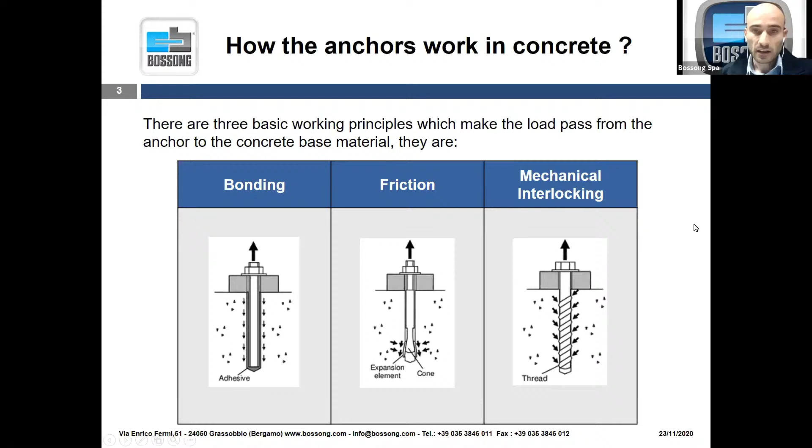So, how do anchors work in concrete? To understand how anchors work in this type of base material, you can see this slide. It's quite easy, and the main principles of working are bonding, friction, and mechanical interlocking. Just to give you a simple overview, you can find each type of mechanism correlated to the type of product that you can find in the market.

Bonding means that bond adhesion is created between the rod and the base material, so basically you have a chemical anchor with a threaded rod or a rebar. Friction is typically used by sleeve anchors or through bolt anchors: the expansion of the cone creates friction between the cone itself and the concrete surface. The other type of mechanism is mechanical interlocking, where the particular geometry of the steel element guarantees an interlocking between the concrete and the thread.

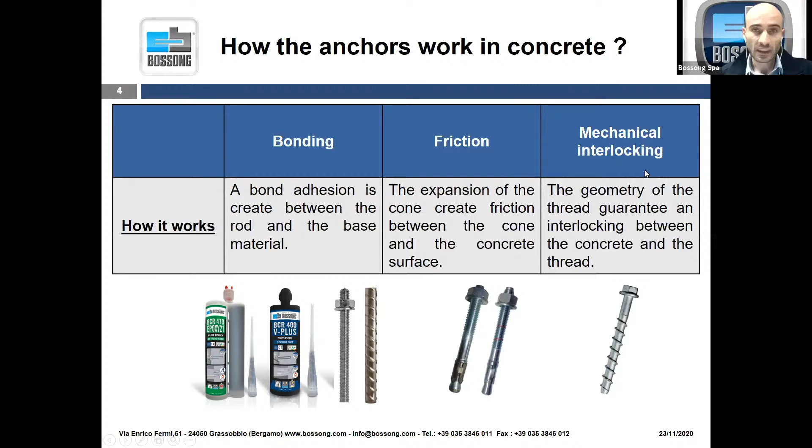The other really important step is the design principle of anchors in concrete. Within the world of fixing, two theories behind anchors in concrete are well known, depending on the type of installation. The first is the standard fixing theory according to concrete capacity design, CCD. The other one is the reinforced concrete theory. In the first one, the main application is fixing a steel element, like a metal plate, to a concrete substrate.

In the second one, the reinforced concrete theory, the target is to connect a new reinforced concrete element to an existing reinforced concrete element. For this purpose, typically only bonded anchors are used.

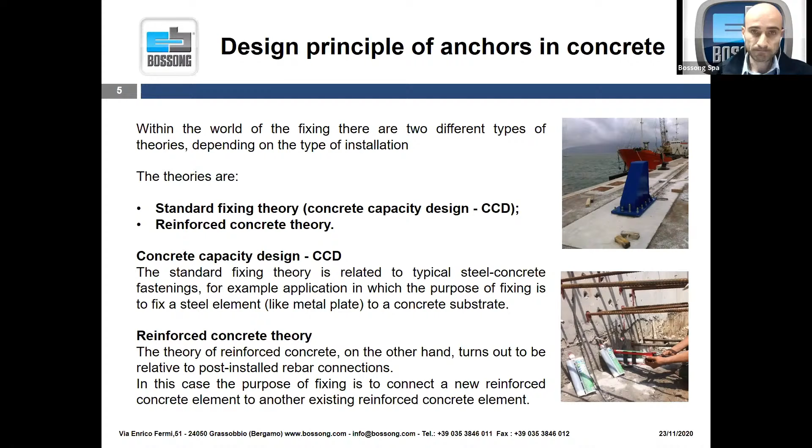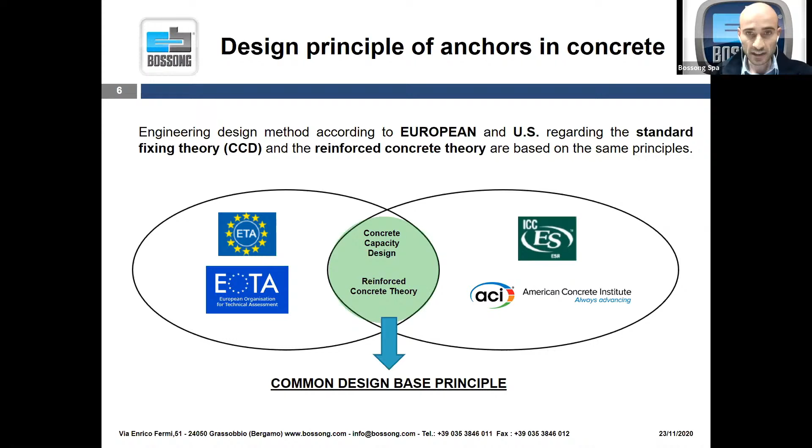European and US systems today represent the maximum knowledge on the behavior of post-installed anchors in concrete. You can see in this slide the two different systems: the European system under EOTA and the US system under ACI. It's really important to define at the beginning that both are based on common design principles, for the concrete capacity design and also for the reinforced concrete theory.

You can see an overview of the European design principles. In the concrete capacity design, the tensile capacity of the concrete is directly used in order to transfer the load inside the concrete. In the reinforced concrete theory, the anchor is designed as a lap splice. This picture comes from the European guideline and the European design document.

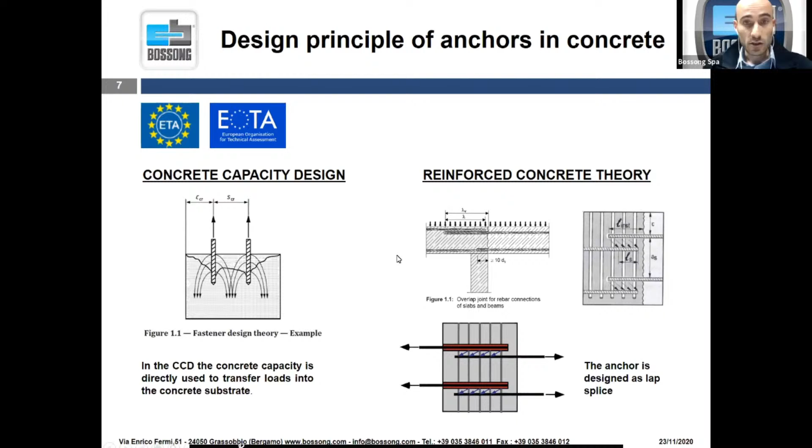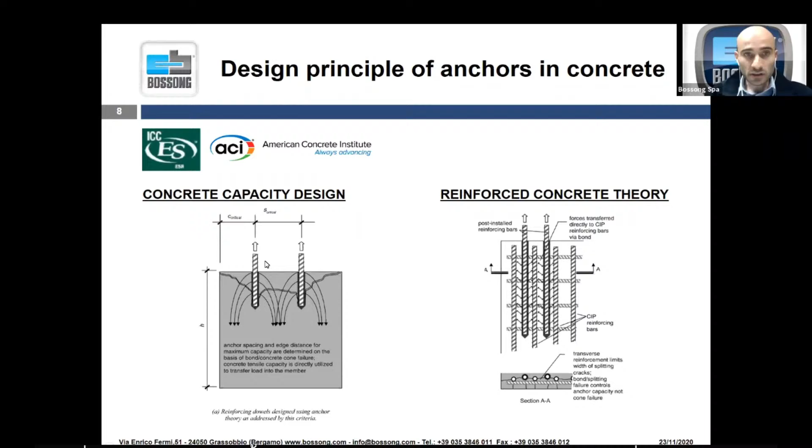As you can see, the same picture and the same principles are used for the US system. In the concrete capacity design, the tensile capacity of the concrete is directly used; you probably know the base principle of concrete cone failure. For the reinforced concrete theory, the post-installed rebars are designed as splice anchors.

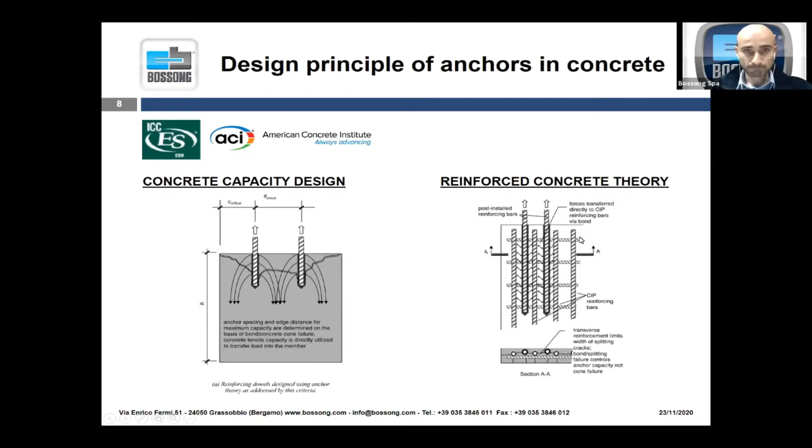Regarding qualification, in Europe the qualification of anchors in concrete is under the EOTA system, the European Organization for Technical Assessment. This organization, thanks also to the participation of industry in Europe, produced the EAD guidelines. EAD means European Assessment Document, and inside this guideline producers in Europe can find all the rules to follow in order to qualify a mechanical or bonded anchor in concrete.

There are a lot of EADs; you can find them on the EOTA website, but the really important EADs today are the following. EAD 330499 regards static and seismic qualification for bonded anchors. EAD 330087 covers static and fire qualification for post-installed rebar connections. For seismic qualification of post-installed rebar connections there is 331522. For mechanical anchors we have 330232, and also the EOTA Technical Report 049 regarding seismic qualification for mechanical anchors.

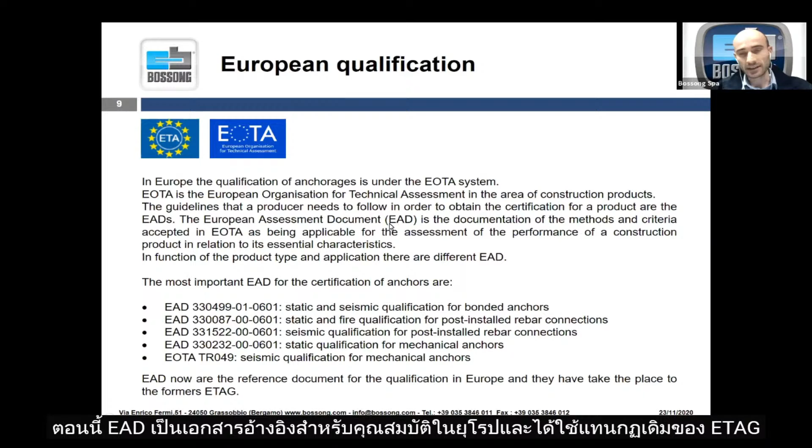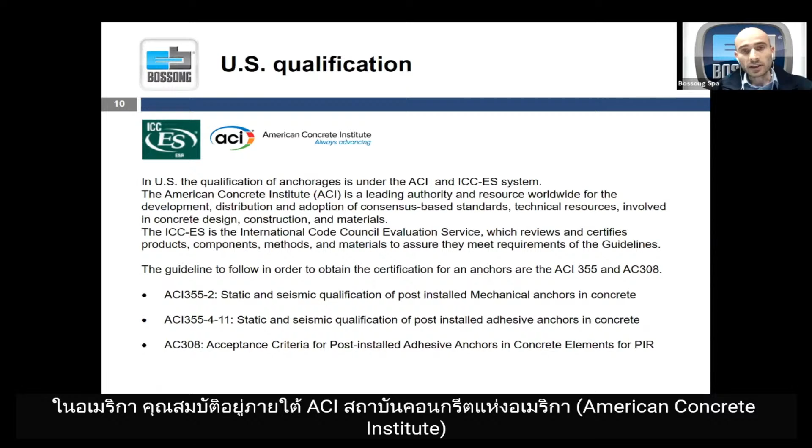In the US, the qualification is under the ACI, the American Concrete Institute. ICC-ES is the International Code Council Evaluation Service, which reviews and certifies products, components, methods, and materials to assure they meet the requirements of the guidelines.

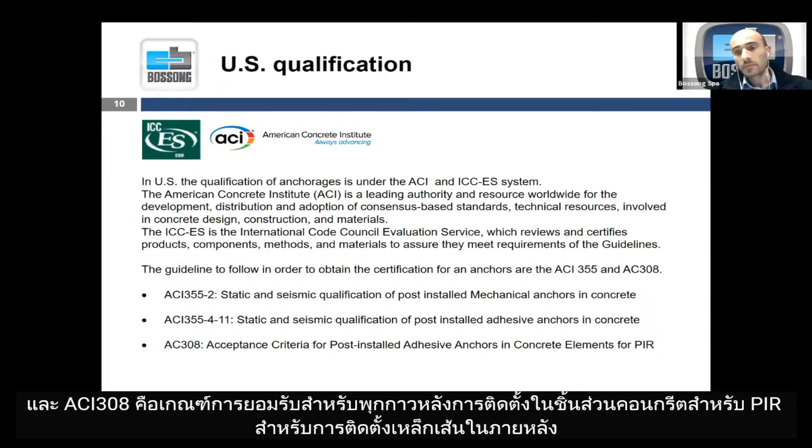The guidelines to follow to obtain certification for anchors in the US are ACI 355 and AC308. The first, ACI 355.2, relates to static and seismic qualification of post-installed mechanical anchors in concrete. For adhesive anchors, the guideline is ACI 355.4. And AC308 is the acceptance criteria for post-installed adhesive anchors in concrete elements, including post-installed rebar connections.

I hope that this slide is useful for you. It's just a summary table of the main documents relating to the European and US systems. If you want to go in depth into this document, you can find it on the website, and you can find the certification of the product, and also some documents and research regarding the design standard, which in Europe is Eurocode 2-4 and also the European Technical Report 055, and in the US system the design standard is ACI 318.

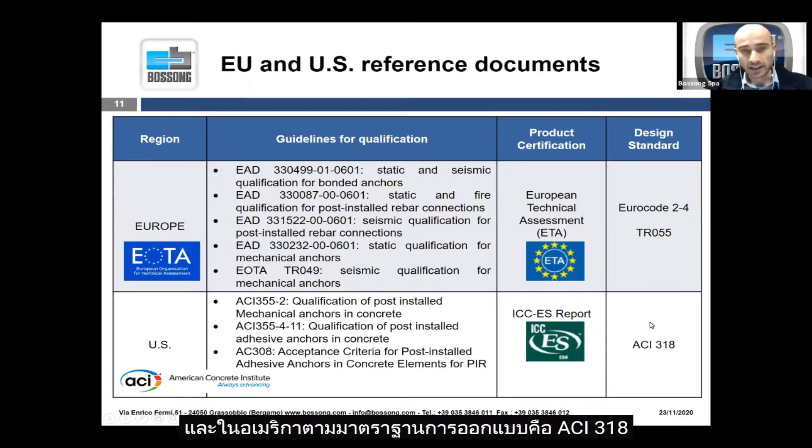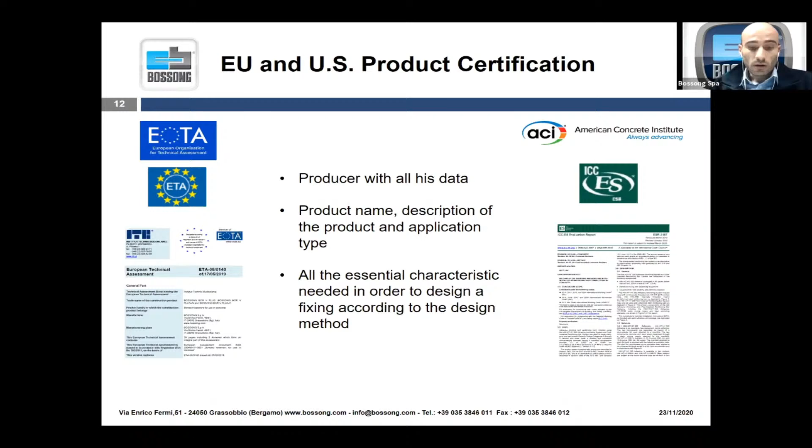About the certification, in Europe we have the ETA, the European Technical Assessment. In the US, the product certification is the ICC-ES evaluation report. Both documents include the technical performance relative to an anchor product. Inside you can find data about the producer, the product name, description of the product, the application, the intended use, the essential characteristics, the performance. So it is the document used by the designer and by the subcontractor in order to understand the level of performance of the product.

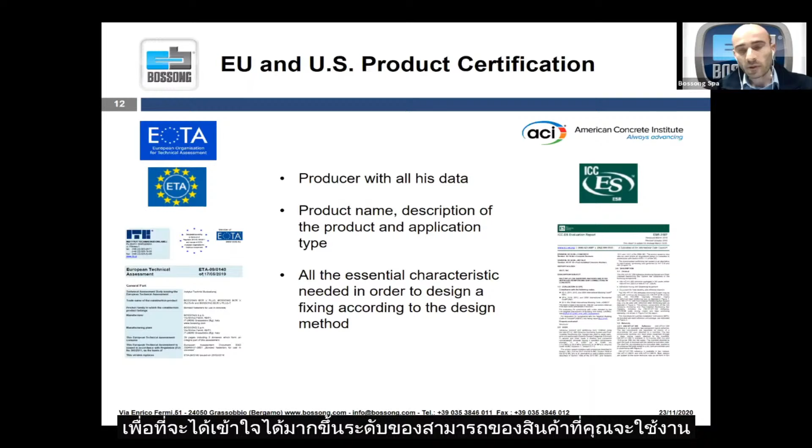An important topic regarding the European and US systems is the seismic qualification. Today it is a very discussed and important topic, and on the web you can find a lot of research, dissertations, and opinions. Let me say some brief notes about it. In the US system in 2001, the ACI 355 document included for the first time the seismic qualification for post-installed anchors in concrete, and then they reviewed this type of document in the following years. And today they have only one test protocol.

Instead, in Europe, the seismic qualification was introduced only in 2013. The first document was the ETAG Annex E. Then the ETAG Annex E was renamed EOTA TR049, and now the EOTA TR049 will take place inside the specific EAD for bonded and mechanical anchors. And today in Europe, for seismic, we have two test protocols: test protocol C1, let me say less severe, mainly relative to non-structural applications, and the new protocol C2 that is more stringent and dedicated to structural connections.

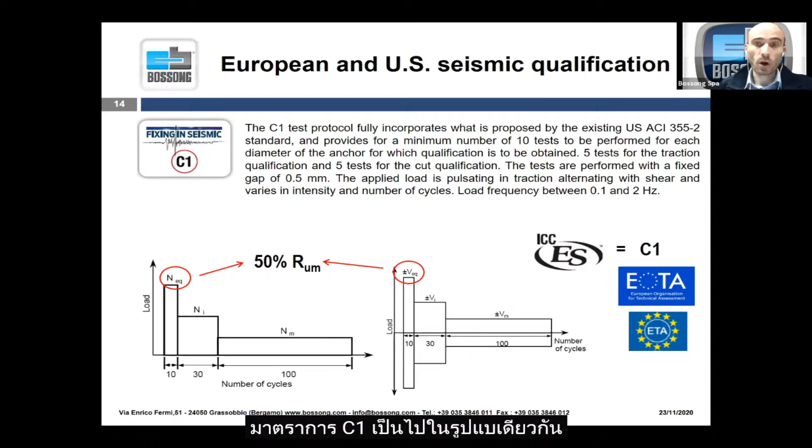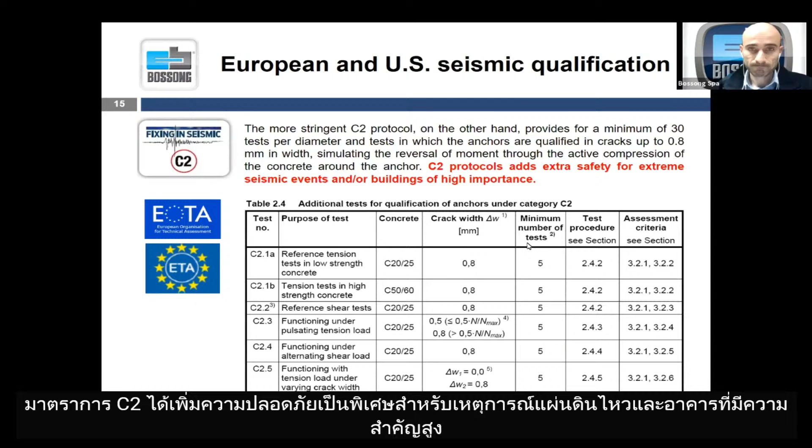So in the world today, for fastening in concrete, some countries prefer to use the European system, others prefer to use the US system, but both systems represent the highest state of the art on this subject. In fact, these important organizations, EOTA and ICC-ES, expressed their will to collaborate in order to align all the technical specifications and to allow the free use of both certifications around the world.

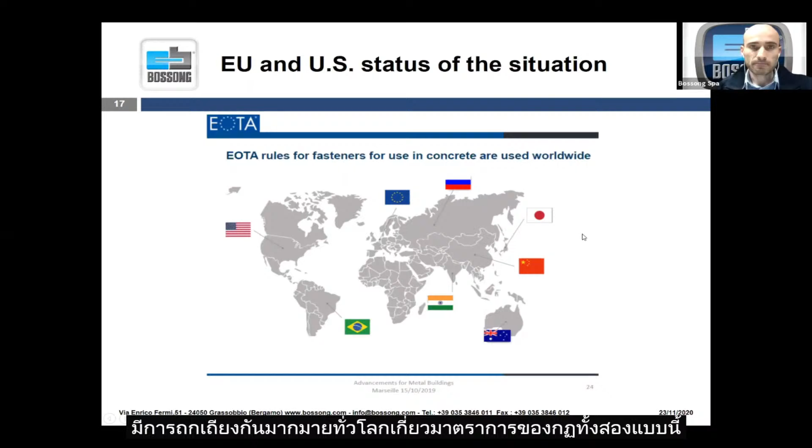In this slide, you can see some news and articles that come from the EOTA and ICC-ES websites. You can also find the link here. As you can see, the EOTA rules are used worldwide, but of course, in some countries, designers prefer to use the US system. So there is a lot of discussion around the world about the two systems. This is the article from ICC-ES.

So in conclusion, it is clear that both systems, in terms of testing and assessment, are based on the same principles. And so the European system and US system are really similar. Of course, there are some differences, but the two organizations are working to align the situation. The seismic design is quite the same, but the difference is the protocol: protocol C1 is really the same, but protocol C2 in Europe is really different, more severe, and adds extra safety.

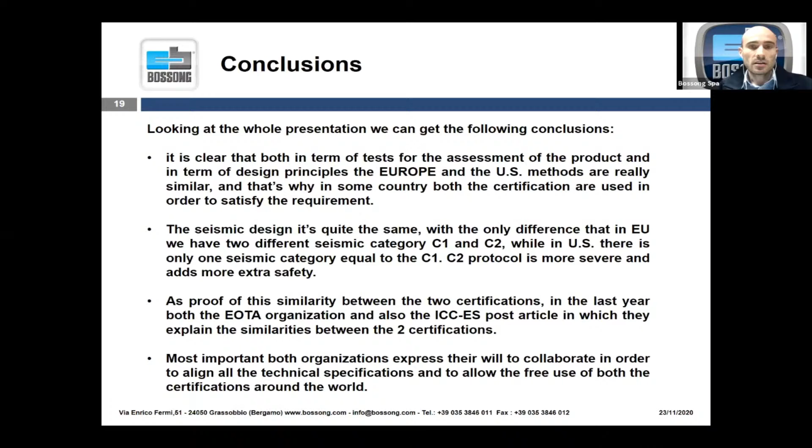As proof of this similarity, in the last year the EOTA organization and also ICC-ES posted articles in which they explained the similarity between the two certifications. And as I told you before, these important organizations expressed their will to collaborate in order to align all the technical specifications and to allow the free use of both certifications around the world.

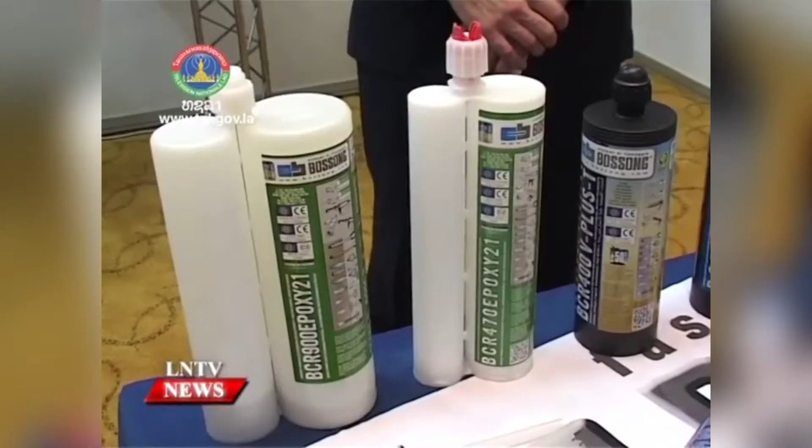Its core production is in Italy. We are active in the fastening market for construction, and our core business is chemical anchors, very advanced chemical products that are used in construction all over the world. We are for sure among the top 5 in the world market for the quality of these chemical anchors.